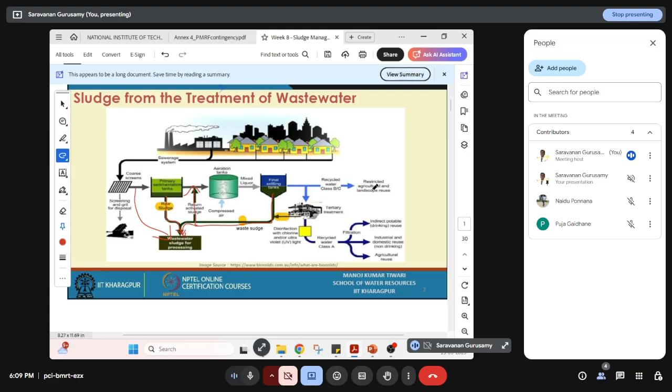If some tertiary treatment with chemicals is required, that also will produce some sludge, that is chemical treatment sludge. Okay, so any conventional biological wastewater treatment process, although efficient in removing organics, generates a large quantity of excess sludge because we are using microorganisms for the removal of organics. They will eat the organics, grow, and their cell mass will increase, right? So new cells will be produced.

After new cells are produced, the old ones will die. So the whole bulk biomass settles as suspended solids. That's why a large amount of sludge will be produced in biological treatment processes, especially in aerobic treatment systems. Anaerobic will produce less sludge, like 5% or something, but aerobic will produce 45% sludge, right? That's what we discussed last week.

So sludge refers to residual semi-solid material, a settled byproduct from different treatment plants and systems. So the quantity of sludge will be based on the degree of treatment we are doing. If we are treating only 50%, then 50% will be coming as sludge. If you are treating 70%, then 70% will come as sludge, right? So the quantity of sludge is based on the degree of treatment.

And don't think of sludge management as a simple task. Most of the cost for the treatment plant, 50%, will be for sludge management. Sludge handling itself accounts for 50% of the total cost of a sewage treatment plant. And think about the total cost. If you are spending like 10,000 for treating this much water, 5,000 will go only to sludge handling. Then this is a big matter, right?

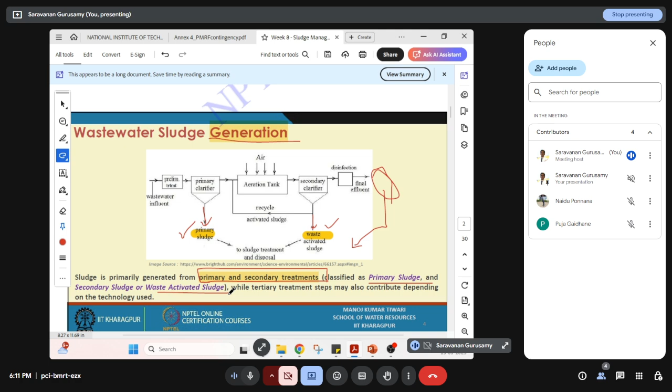Primary and secondary treatment will give you primary sludge and secondary sludge, or waste activated sludge. So these are the types of sludges. I mean, two are the types of sludges. Secondary sludge is also called waste activated sludge. And if any tertiary treatment also contributes, that is called tertiary sludge.

Yeah, what are the characteristics of the primary sludge? As I mentioned, the primary settling tank will only remove the readily settleable organic solids. So mostly it will be organics, and some inerts will also settle, similar to the grit chamber. Then the secondary settling tank will be after biological treatment, so mostly it will be organics only. Dissolved organics will form biomass and that will settle. So mostly the secondary settling tank will have organics.

So primary sludge will be composed of settleable solids from the raw wastewater, in sedimentation and at times in the grit chamber also. The grit chamber will be fully inorganics. Sedimentation will be organic but suspended, right? So the generation range, if you see, is 100 kg, average 110 to 170 kg per million liters. So if you have a plant of 10 MLD or 5 MLD or 100 MLD, calculate the kg of sludge accordingly. That much huge tons of sludge we are generating.

What do we do with the sludge? We are simply doing a phase transfer, right? Whatever the waste in the wastewater, we are converting it again into the solid phase, and we need to treat this solid waste also again.

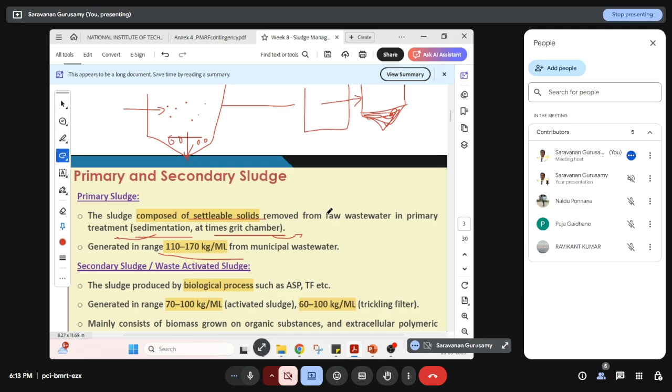So that's the problem. So sludge management is a major cost incurred in a project. Okay, then secondary sludge, if you think, that will be from the biological process like ASP or trickling filter. The trickling filter also, if you see the tank, after pouring all the water, it will pass through the filter and it will come out as big sludges. Like filtration also will happen; after this it will be sloughed off and it will come along with the effluent. That will also be collected.

In ASP also we have a secondary settling tank. In trickling filter also we need a secondary settling tank. So this generation will be 70 to 100 kg per million liter of activated sludge. For trickling filter, it will be around 60 to 100 only. So mainly it consists of biomass. There it will be inorganics. Here it will be fully biomass, grown on organic substances.

Got it? Yeah. So different stages of sludge, as I mentioned, again primary sludge, secondary sludge or waste activated sludge. That will be first thickened. After sludge got produced, it will be thickened and it will be sent to the digester. So that is digestion. After digestion, it will be dewatered. Finally, the dewatered sludge will be managed properly. You got it? The whole system is called management. Finally, it will be disposed.

Okay. First, we need to reduce the volume, that is thickening. Then digestion, so any leftover organics that are there will be digested. Then conditioning. After that, dewatering. After that, sludge disposal. You got it? The whole chart I will show you in a minute.

So the major problem with the sludge is sludge contains only 10% solids, the remaining 90% will be water. You got it. So think about the total quantity. If you have 100 kg of sludge, 90 kg will be water, only 10 kg will be your solids. So simply if you put it on gravity itself, 90 liters of water will come out. Only 10 kg will be retained in the tank. So gravity itself will remove all the water, right? So sludge is not only having solids, it will have mostly water in it, 90%.

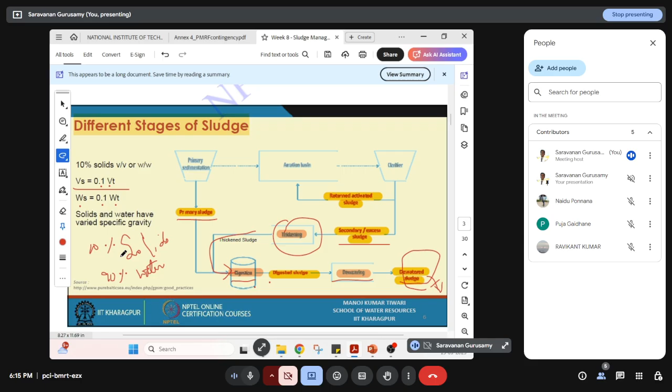So volume calculation, if you do, volume of solids will be 0.1 times the total volume, and weight, if you see, that will also be in terms of this. So you can calculate the specific gravity. If you are given the total specific gravity of the sludge, and you know the specific gravity of the water, then you can find how much solids are in it. You got it? Yeah. To calculate the quantity and what will be the characteristics of the sludge.

If you see the primary sludge, that will come from the grit chamber, scum tank, that is the skimming tank, which will remove all the scum and grease, and then primary sludge from the chemical precipitation. So screening will be mostly organics and inorganics like plastics, rags, wood, everything will be taken in the screen, right? So based on the screen size, it will get clogged. So that contains mostly organics or inorganics. It will vary based on the seasons.

Then grit will be fully inorganic solids because it will settle, like sand and clay particles will be settled in the grit, and it will be of relatively high settling velocity. Okay. Then scum and grease, it will be floating materials like grease, vegetable, minerals, animal fat, wax, soap, hair, paper, cotton, cigarettes, plastic materials, and all will be floating. That will be taken with the scum and grease chamber, the floating materials.

Then primary sludge from the primary sedimentation tank will be gray and slimy, and it will be readily digested under suitable conditions because it has mostly organics that can be easily digested. Sludge from chemical precipitation will be dark in color, mostly containing iron, because we are using iron as a chemical to make the flocculent sludge, right? So iron will also come with this sludge. What we have added will come along with the sludge.

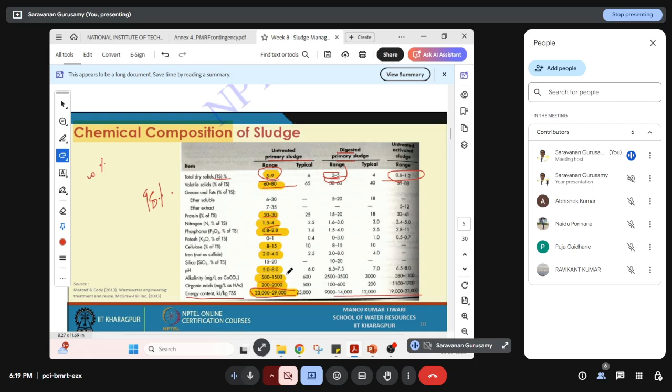Then the energy content of the sludge is very high, like 23,000 to 29,000. After digestion it will reduce, but untreated primary sludge has lots of energy content. So after removing the water, the dried sludge we can use in an incinerator, like cow dung. After drying, we can use it as an energy source, as a fuel. Similarly, most of the sludge solids are organic, having calorific value. So this is a major characteristic of the sludge.

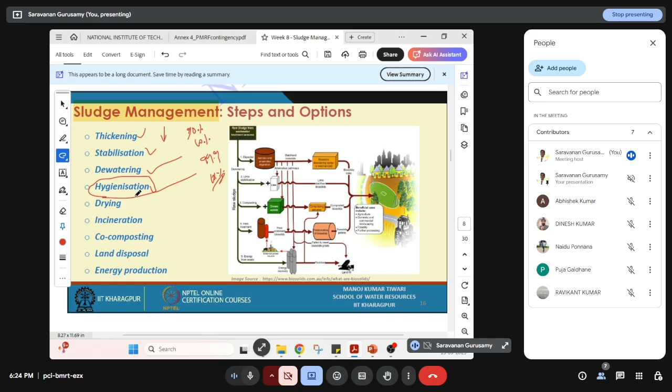Then stabilization is whenever there are odor-producing compounds or partially degraded organics that need to be stabilized. Then dewatering - any excess water is removed. Then hygienization - since it's from wastewater, pathogens need to be killed, sterilized before disposing. Then drying. After sterilization, we can dry the waste and think about disposal: incineration, co-composting, land disposal, or energy production, based on the characteristics. If it's inert material, we can simply dispose in the land. If organic, we can think about co-composting. If it has high calorific value, we can think about incineration or energy production.

So thickening - after reducing the water content, some portion will be there, only solids that need to be stabilized because it has some volatile content, so half of that will be removed. That needs to be dewatered again, so again 70% will be removed. From that we have to do drying. So after drying, again a small quantity of sludge will be there, but that itself is a huge quantity. That needs to be disposed properly, based on characteristics - incineration, composting, or land disposal. You got it?

So can you explain the flow chart diagram? This flow chart - yeah, let me do it.

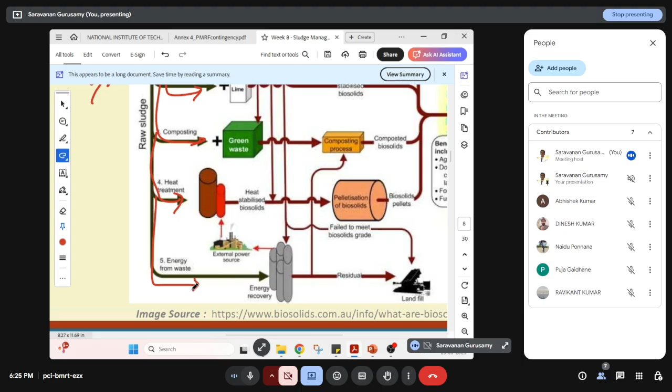Sure, so here, if you see raw sludge from the wastewater treatment plant - where it is coming from, we have grid screening first, then grit chamber, then primary settling tank, then secondary settling tank. All the primary as well as secondary sludge is coming in. I am going to explain all this process in the upcoming slides. First we are going to thicken the sludge, then digest - digestion is one of the processes of stabilization. Then lime stabilization we can go. After that, composting, heat treatment is one of the sterilization techniques, that is the hygienization technique. Finally, energy from the waste, that is one part of disposal. You got it?

So you can think about this same flowchart - this is one of the adopted methods in the municipality, but you can think about any of these combinations and try. So composting will also give you again secondary or tertiary sludges - that solids you need to take care of. Again you need to think about land disposal and all. So if you are thinking about both material as well as energy recovery, this combination will work out. You can recover nutrients, you can also recover solids, you can also recover energy out of it. You got it?

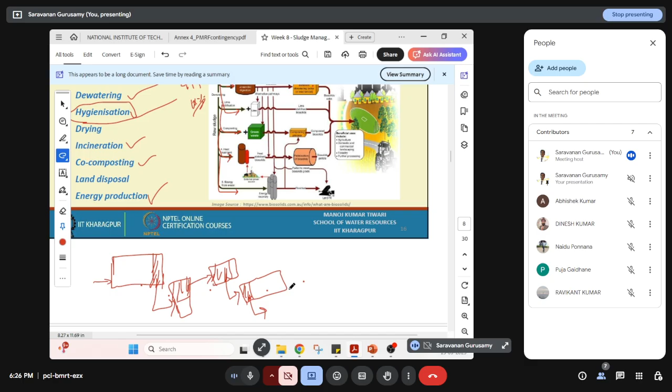Anyway, I'm going to explain all these methods in the upcoming slides. This is first, I'm just explaining the route map: collection, thickening, stabilization, conditioning, dewatering, then disposal. You just make the flow chart. Okay, understand the flow chart, then we will discuss now.

So now the various disposal options: first land-based disposal, fuel-based disposal. Again, sludge disposal options - we have land-based and water-based disposal systems. So think about this land sludge use option versus sludge disposal option - first is benefits and constraints. See, if you are using sludge directly on agriculture, reclamation, forestry as a fertilizer, or reforestation, regeneration of forest - this kind of activity using sludge directly has benefits of nutrients because we have lots of nitrogen, potassium, organic matter in it, and low cost. But the problem is it's vulnerable to the ecosystem as well as to human health, and has variable demand.

We can't supply every day the same quantity. Quality matters, it will not be similar seasonally, it will vary, and competition will impact it. But if you think about fuel-based options like incineration, supplementary fuel for co-combustion, we can do that. Along with coal, we can use the sludge as a secondary fuel, as well as gasification. If we do this, we get green energy, and transportation cost will also be less since it's a continuous process.

But the problem is public perception. People will not allow you to incinerate anything. So even if it is a controlled environment, we can't incinerate any waste, since that will have air pollution constraints like emissions.

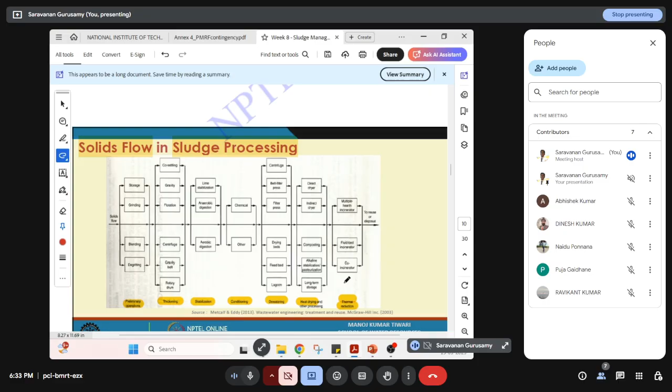Think about sludge processing. As mentioned: primary operation, thickening, stabilization, conditioning, dewatering, heat drying or any drying method like a drying bed, then thermal reduction, and finally disposal — reuse or disposal.

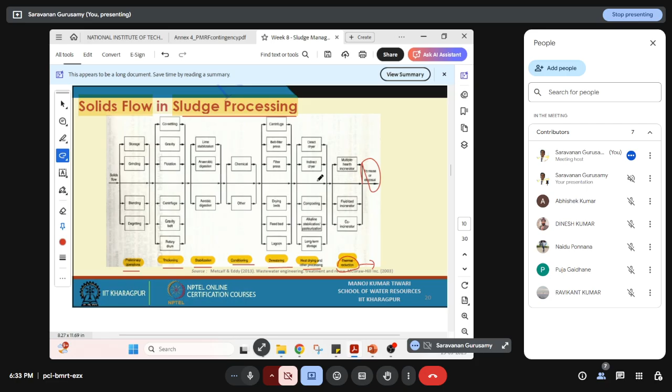Sludge thickening is the first step in sludge management after collection. As mentioned, 97 to 99% will be water content, so the remaining is solids content, that is the dry solid content — 0.5 to 1% if it is secondary sludge, but if it is primary sludge, it will be 4%.

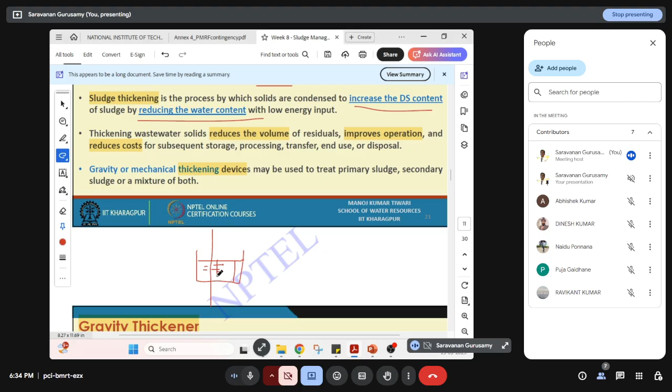What is the purpose of sludge thickening? It increases the dry solids content and reduces the water content. If you have 100 kg, 10 kg is solids and 90 kg is water. If I reduce the water content, the solids proportion increases, say to 50-50. That's the purpose of thickening — it reduces the volume, improves operation, and reduces cost.

So gravity and mechanical thickening devices may also be used. I am going to discuss these devices.

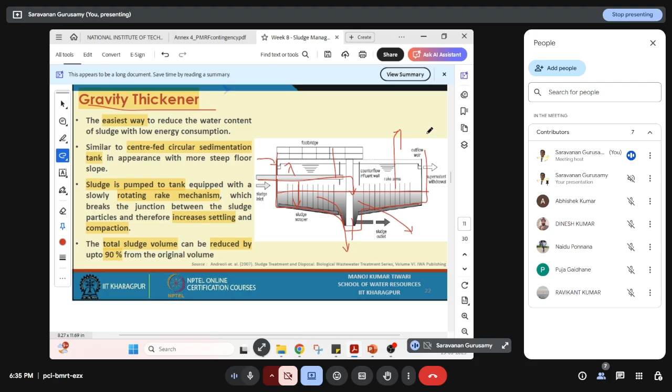First, the gravity thickener. Simply like the primary sedimentation tank, we have a tank with arms for mixing that help take out water from the sludge. It slowly turns and the water comes out to the top while solids settle to the bottom — that's the thickening process. It's a central feed circular tank: sludge inlet feeds in, water is taken out, and thickened sludge is taken from the bottom. Total sludge volume can be reduced up to 90%. If you pour in 100 kg, you get 10 kg of sludge and 90 kg of water out, which can be sent back to the treatment plant.

Here you have to consider the solids loading rate, 90 to 150 kg/TS per square meter per day. Any tank will have a surface overflow rate or solids loading rate, based on how much kg we supply to the treatment system per square meter of area per day. Based on that, we can design the area of the tank.

Then dissolved air flotation: we supply air from the bottom in the same sludge thickening tank, and it mixes continuously. The bubbles help take out the water, and the thickened sludge is taken from the other side. The solid particles with attached bubbles have lower specific gravity, so they separate from the water. We add air because solids have a specific gravity of 2.5, but adding air bubbles reduces the specific gravity so solids come out this way. We can also add alum or polyelectrolytes to increase flotation efficiency. We design based on solids loading rate, in the range of 100 to 150 kg/TS per square meter per day.

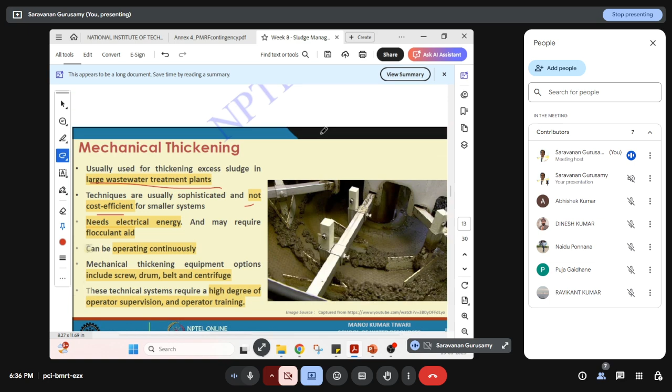Then mechanical thickening — usually used in large wastewater treatment plants, but not cost effective since it's simply a tank. Here we need to operate mechanical arms, requiring electrical energy and flocculant aid, operating continuously, but that is the only best option.

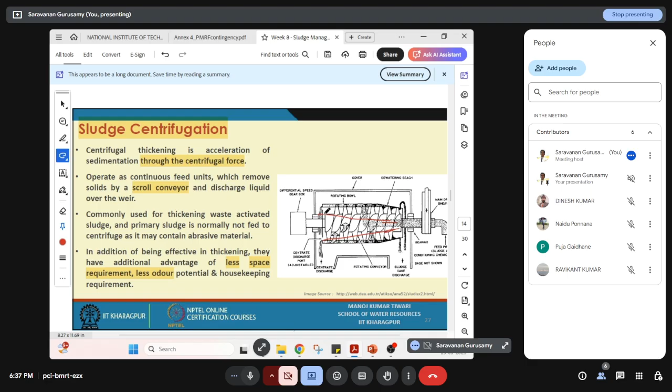We have different mechanical thickeners like screw, drum, belt, and centrifuge. You see, the screw will be reducing the screw area. So first it is the centrifuge system they are explaining. Here there is no size reduction, the size is the same, but if you see here the size is reducing, right? That is a screw.

This is the centrifuge. The sludge is given as an input and it is turning at a fast speed, like a washing machine kind of thing. So all the heavier particles will be forced to the circumference. That's the centrifugal force, right? The same process we are using in air pollution equipment also, like the air is passed through a centrifugal system so that all the heavy particles like solids will be attached to the surface and settle, and pure air will go out.

Similarly, I'm putting sludge into the system, it will be rotating at a faster speed, so the heavier sludge will go to the circumference and only the water will be coming out. You got it? This requires less space. A normal thickener will have a big tank, but this requires a small land area.

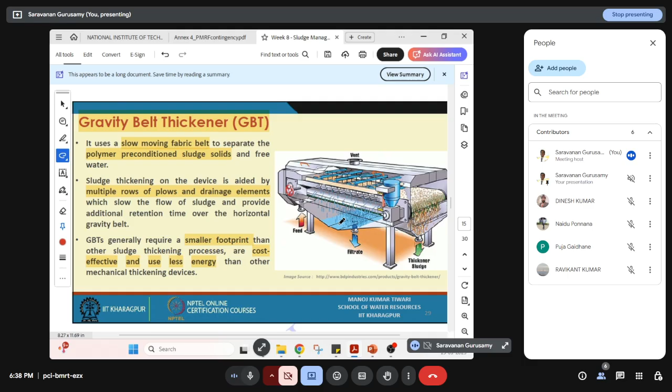And the rotary drum thickener, here there is a filter bed. So, a filtering drum. Both sides you have a filtering drum, and feed will be given into this. While moving in this, water will be drained, so filtered water will be taken out. Again, it can be conditioned along with polymers. Then the belt thickener. It's moving with the belt and water will be coming out. Same like the drum thickener. This is a belt thickener.

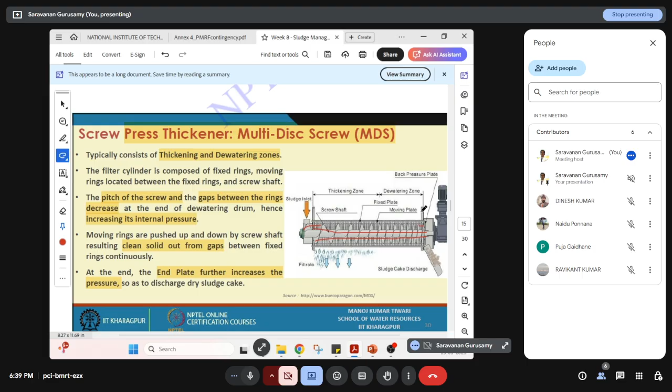Finally, the screw press. Whenever this much area reduces to this small area, the sludge is screwed, right? So while screwing, we have a squeezing effect. Squeezing will remove the water content of the solids. So if you see the performance, the screw thickener will give 4 to 7% dry solid content, but when it is higher, you can use other things like drum thickener, belt thickener, centrifuge thickener.

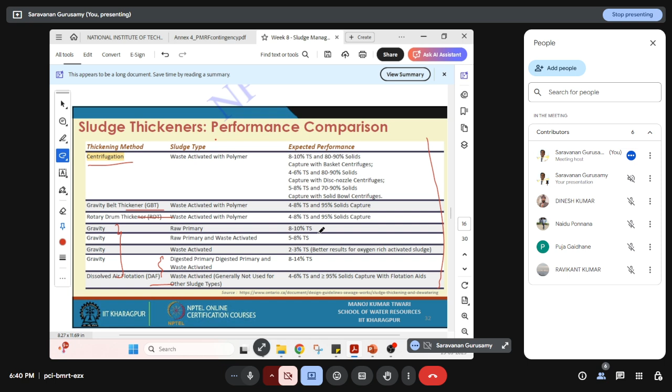Why? Air will attach to the solids and reduce the specific gravity of the solids, and then they can be taken out separately. Right? So think about the solid capture efficiency, how much percentage of solids is captured. It will be higher for gravity, 8 to 14.

Now we are going to sludge stabilization and conditioning. After thickening, what is the second step? The undecomposed or partially decomposed organics need to be taken care of. That's sludge stabilization. After thickening, the second step is sludge stabilization or digestion. We are using aerobic and anaerobic treatment systems for sludge digestion because the partially decomposed matter needs to be fully decomposed. Sludge stabilization reduces the reactivity of the sludge, so whatever organics remain will be digested and the residue will have zero reactivity, right?

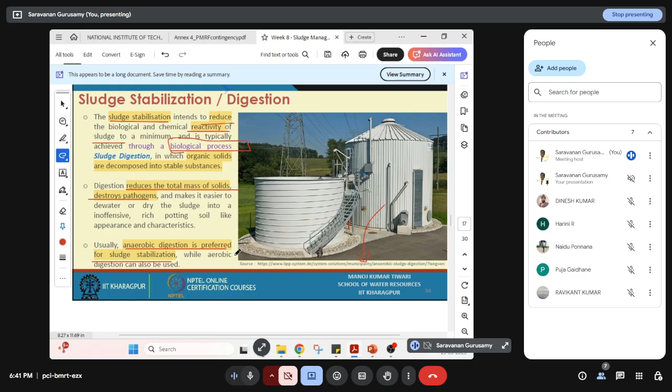So what process can we use? Again, biological process only. It reduces the total mass of the solids and destroys pathogens, because an anaerobic system can also reduce the pathogen content. Anaerobic digestion is preferred for sludge stabilization because of the strength of the wastewater. If the strength is more, we have chosen anaerobic only, right? Because we can recover methane out of it.

But here the reduction of organic content is 40 to 50%. And in thermophilic digestion, by addition of heat, the sludge is fermented in the tank at 55 degrees Celsius. If you are not using temperature, then mesophilic bacteria will act, and 36 degrees will be the optimum range. Mostly it will be taken care of by the facultative anaerobes, that is, the anaerobes that can live both with oxygen and without oxygen.

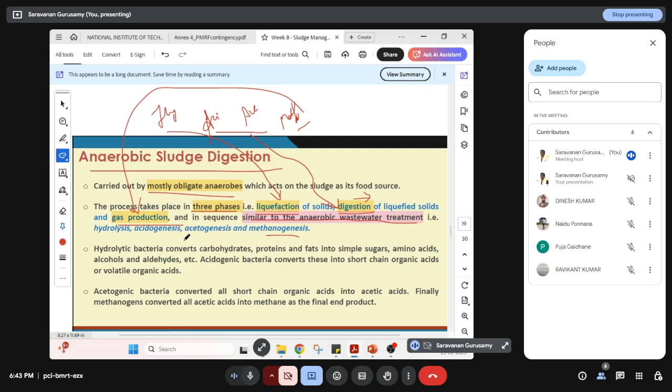Acido and aceto they will take as digestion, and methanogenesis they are calling gas production. Similar to anaerobic wastewater treatment: hydrolysis, acetogenesis, methanogenesis. Here 3 steps: liquefaction, digestion, and gas production. So all the high molecular weight organic compounds will be converted into short chain fatty acids, and then short chain organic compounds will be converted into acetic acid, that is acetogenesis, and then methanogenesis.

Acetic acid will be converted into methane plus carbon dioxide plus other trace gases like hydrogen sulfide, nitrogen, and hydrogen. Overall, the organic matter will be converted into methane and carbon dioxide, and also new cells will be produced. That will be anaerobically digested biomass, and energy for new cells will be produced. Other products will be H2S, H2, and N2.

Again, anaerobic sludge management has 2 reactor setups: one is low rate and the other is high rate. In low rate, we are feeding the sludge, and digested sludge will come to the bottom. The active digestion will happen in the active zone. Water will come up, that is the supernatant, and a scum layer will be there. The produced biogas will be stored in this gas tank and taken out. That is the low rate reactor.

But if you think of the high rate reactor, there are no distinct layers. All will be completely mixed. So the whole reactor will act as an active zone, and then we need a secondary tank to settle. The digested sludge for dewatering we have to take to the secondary tank, but gas will be produced here itself. See, single stage and dual stage, that is high rate.

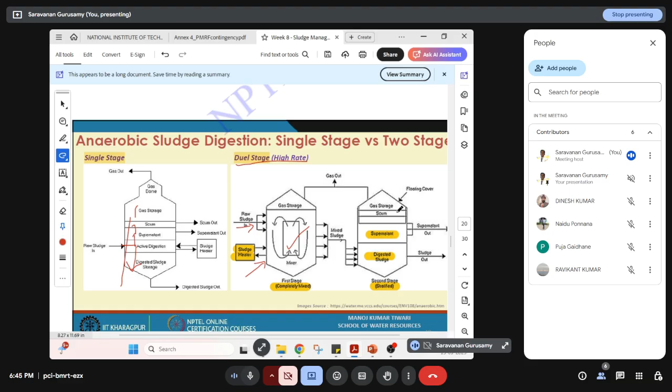Single stage has all the layers: the active layer, digested sludge comes into the sludge layer, and then supernatant and gas storage. But here all these things will be mixed. We can supply heat also. Raw sludge will be fed into this complete mixing. After that, we need a second tank. There won't be any active layer because all activation is happening here itself. So only for settlement we use this tank.

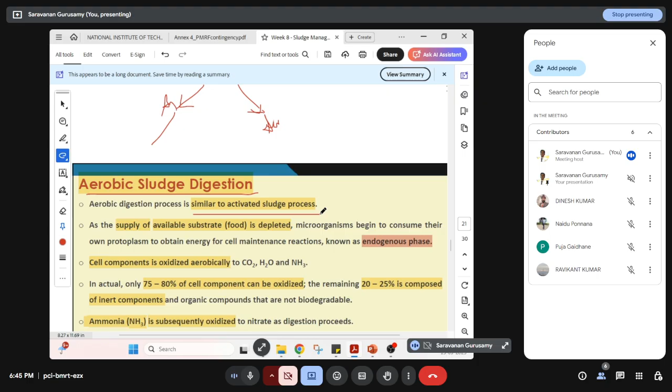Then aerobic sludge digestion. As of now, we have seen digestion by the anaerobic system, which has the same steps. But in the aerobic system of sludge digestion, similar to the activated sludge process, the supply of available substrate is depleted. Because in ASP, air will be passed from the bottom, mixed with the wastewater, and organics in the wastewater will be digested by the microorganisms by taking the oxygen.

We are maintaining the food to microorganism ratio. Food is the substrate, microorganism is the biomass. So we maintain the substrate to biomass ratio so that there is no fasting condition and no feast condition. Similarly, here more substrate is there, but oxygen is low. We need to supply a very small quantity of oxygen because we can't supply that much oxygen in the sludge. The supply of available substrate food is depleted; we are not supplying full food.

So microorganisms begin to consume their own protoplasm. Here the endogenous phase is happening. Cell components are oxidized, so CO2, H2O, NH3 will be released. 75 to 80% of cell components will be oxidized because the bacteria start degrading their own biomass. 20 to 25% will be inert compounds that cannot be degraded. Ammonia will also be oxidized in this aerobic sludge system because we are supplying oxygen.

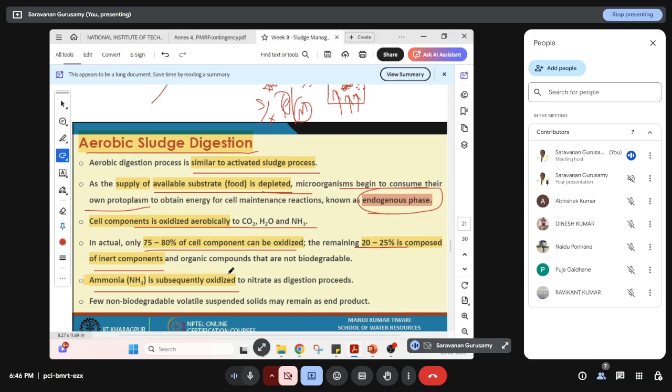Any organic matter or microorganism biomass reacting with oxygen will give you CO2, H2O and ammonium carbonate. Here there is no CH4. Why? Because we are adding oxygen; it is aerobic sludge treatment. C5H7NO2 is the formula for the cell mass, any bacterial biomass. So it is aerobically digested, and this is the major pathway.

Nitrification will also happen, so overall we have nitric acid as a product. Then denitrification will happen, reducing nitrate to nitrite and then nitrogen gas. So that's the process. Ammonia will be converted when oxygen is added to NO2 nitrite, then after adding oxygen, NO3 nitrate, and then the denitrification process will produce nitrogen gas.

Then after thickening, after stabilization or digestion, the third step is sludge conditioning. Why do we need to condition the sludge? So that it can be easily dewatered. Okay, so to improve the dewatering characteristics, we need to prepare the sludge for dewatering. That preparation step is called sludge conditioning, right?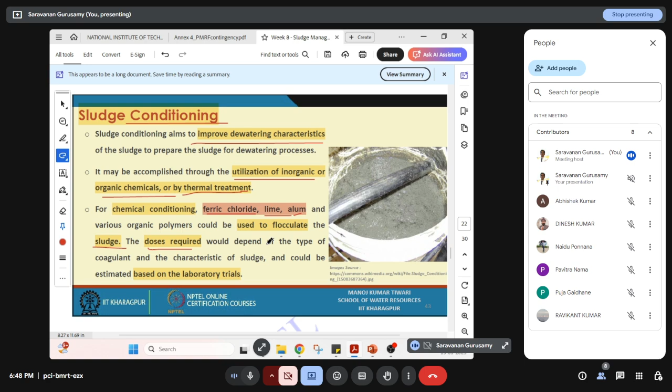So for preparation, we can use salts, minerals, lime, or metals. So using inorganic or organic chemicals or by thermal treatment, we can condition the sludge. Chemical conditioning means ferric chloride, lime, alum, or conditioning agents used to flocculate the sludge so that it can be easily dewatered. How much dose of these chemicals is required is based on laboratory trials. We can take the sludge to the laboratory and do different trials to identify the dose of chemical

conditioners, right? So sludge conditioning by thermal treatment: wet air oxidation and heat treatment. The temperature goes up to 300 degrees in one, up to 200 degrees in the other. We have 8 Newton per meter square pressure, and there 1 to 2 Newton per meter square of pressure. Low temperature and pressure heat treatment coagulates solids and breaks down the gel structure. All this conditioning is flocculation techniques only. All the solids come together and form a floc. That's called coagulated solids, and it breaks down the gel structure.

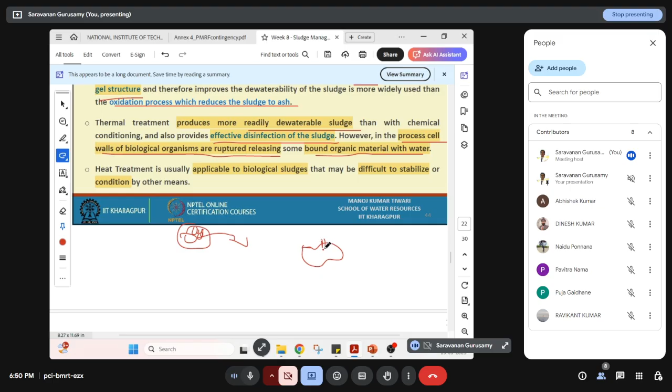The oxidation process reduces the sludge to ash because it's a thermal treatment, right? Another important advantage of thermal treatment is it will effectively disinfect the sludge, because the heat will degrade the pathogens, and it produces readily dewaterable sludge. Also, the cell walls of biological organisms are ruptured, releasing bound organic matter into water. Most of the sludge is biomass, so thermal treatment breaks down the cell wall so the water inside comes out. That reduces the water content of the sludge.

That's why thermal treatment is usually applicable to biological sludges that are difficult to stabilize or condition by other means. You got it? So sludge conditioning is required to improve the dewatering characteristics. The next step is dewatering. In the conditioning mechanism, with chemicals like alum, ferric chloride or lime, only flocculation happens, but with heating, cell wall breakdown, hygienization, surface property change, cell splitting, everything happens. Inorganic chemicals increase the sludge mass, but heating reduces the existing cell mass because we are breaking it down. So solids reduce. Finally, dewatering, hygienization and disposal.

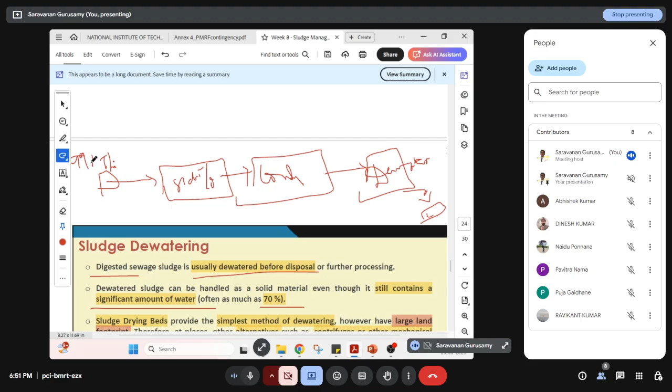If you see here, thickening. After thickening, it goes to stabilization or digestion. After digestion, we do conditioning. After conditioning, we do dewatering. Why do we need to dewater now? The remaining water will be removed. Finally, drying will also be there. We usually dewater the digested sludge before disposal or further processing. It still contains a significant amount of water, up to 70%. The 99% water was reduced to 70% at this stage, so we need to reduce it still further.

The sludge drying bed is the simplest method, but it has a large area footprint. Alternative methods are mechanical, like centrifuge and other mechanical dewatering systems. In a centrifuge and belt filter press, we put the sludge into the filter press, which presses and removes the water from the sludge. That's another dewatering principle. We also have the chamber filter press and screw press, relatively expensive compared to other means. Simply, we can use a sludge drying bed.

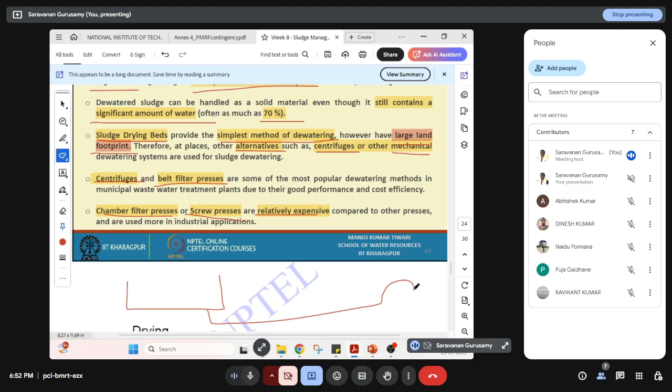If you go to any municipal treatment plant in your area, or in NIT also, we have two STPs, sewage treatment plants, with drying beds. All the sludge collected is put into the drying bed, where it dries, and cracks form, which indicates complete drying of the sludge.

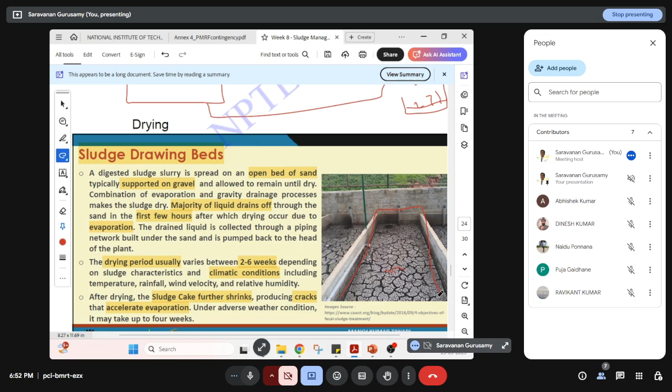So that can be taken out and we can dispose properly. See here, we have seen this kind of tanks, right? Mostly in the STPs. So sludge drying bed, not drawing, that's a drying bed. Okay, so it's an open bed having sand and stone at the bottom as a supporting layer. So above that we can put the sludge with 70% of moisture content.

So majority of the liquid drains off. So we have a perforated pipe at the bottom. So whatever the water that is coming, that will be collected through the pipe and it will be coming out. So first a few hours itself, it will be removing all the water under gravity as well as the evaporation. After that, it will be still operated at 2 to 6 weeks, so that whatever the remaining water content will also get removed by evaporation.

Finally, there will be a sludge cake. That cake will shrink, cracks will be formed, that will all again accelerate the evaporation process. You got it? That final sludge cake is ready now. So that can be disposed or used for energy production.

Again, if you see the section view of the sludge drying bed, we have a supporting media and a perforated pipe drainage system. First few hours draining will happen, then evaporation will happen, and in the course of time again evaporation and draining will happen. Okay, so focusing on the weight reduction, all this sludge management will concentrate on volume and weight reduction by removing the water. Okay, so the disposal cost will be minimum after doing all this.

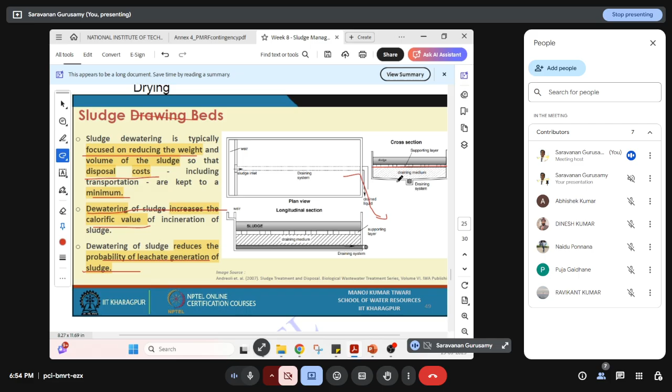Right. So other methods we have: belt press, polymer conditioning, lime. Polymer, why are we adding polymer? That will also remove the water content. Right. So here the best is sludge drying bed only. But why are we not using that? It has a larger land footprint. We need a huge land. 7 days means 7 drying beds kind of thing we need.

But centrifuge and all, it's an equipment or mechanical device to dewater, like belt press, filter press. I don't have an image of that. Let me show you. There are two belts. So the sludge will be moving through this. So that presses the sludge and it will form a cake out of it. So water will be coming out through the filters. That's a press filter.

And then finally hygienization. Why do we need to hygienize? Because all the sludge will be produced from wastewater treatment plants that have mostly pathogens. Because human excreta may have pathogens, sewage will mostly have pathogens, right? So we need to hygienize by sterilizing the bacteria, disinfecting to remove the pathogenic bacteria, as adopted by the competent authority.

Why do we need to conform to the disposal standards? Now, most of the government organizations are releasing toolkits and guidelines for the disposal of sewage and biosolids. Fecal sludge. I have attended a program on fecal sludge management in the CSE, Centre for Science and Environment. You can see in Google CSE. They have a toolkit for fecal sludge or biosolids management.

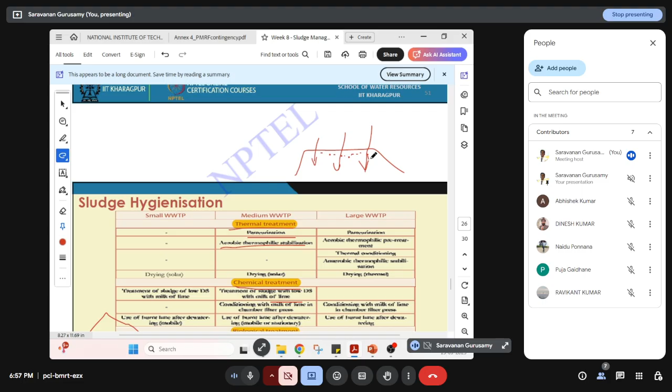Again, it will increase the water content, but still it will be taken along with the sludge itself. So, if you spray bioculture, it will stabilize or remove the bacteria in it. Right? But if you compare composting, lime treatment, and the pasteurization technique, investment cost will be high for composting, but the energy demand will be high for pasteurization. Chemical demand will be high for lime treatment. Structure material will be high for composting.

Again, sludge dewatering is needed because in composting we are adding bioculture. So again, sludge dewatering is needed. Then space needed: composting will be higher. Hygienization: very good hygienization will happen in pasteurization. The same way we are doing for milk, we can do for sludge also. Okay.

Finally, how can we dispose the sludge cake? Now we are ready with the sludge cake without water or very less water content. So we can think about the calorific value now, because most of the sludge solids have calorific value, right? So for a positive energy balance, it's the incineration technique, utilization of calorific value. The amount of sludge generated at the municipal wastewater plant is very large, because we have tons of sludge every day. But incineration has another problem, which is air pollution control.

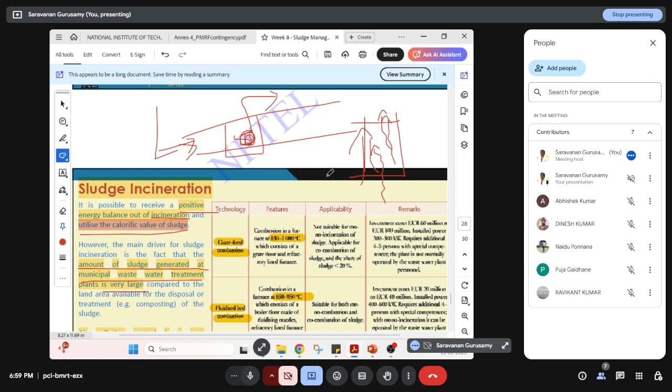That's a major consideration. We have different types of incineration techniques like the grate system and the fluidized bed system. We are passing the sludge onto the grate, that is an oven kind of thing. There all things will be burnt and the gas will be taken out. But the fluidized bed will be on full heat structure. We are passing the solid to float or suspend. The fluidized bed will volatilize the waste and gas will be produced. So that kind of incineration technology you can think on. The temperature here is 850 to 1000, and here it is 850 to 950 degrees Celsius.

See, the sludge energy system. We are producing energy; sludge will again go to anaerobic digestion. With the produced gas, after purification, we can use a natural gas system, right? Final disposal on land or in oceans. Ocean, I think nowadays it's banned, but burying underground in a sanitary landfill is good. But how far? Because we need a liner as well as a capping system. A more advanced method of sludge management is using it as compost or for agriculture. Again, the problem is with the pathogen. If you have a full hygienization technique, you can think about it as a fertilizer and for landscaping, because it has good nutrient content.

I have also published a paper on soil-like material that is recovered from the landfill. How can we use this in agricultural land? I have tested the seed germination as well as the leachability and the pathogenic activity of this soil-like material, so that it can be used along with the agricultural soil in different compositions from 0 to 100%. But my conclusion is, since it has toxic compounds similar to this sludge, like industrial chemicals, it cannot be used for edible plant growth. So we can use it for non-edible plants like sunflower or other oil production. So it's not for human consumption.

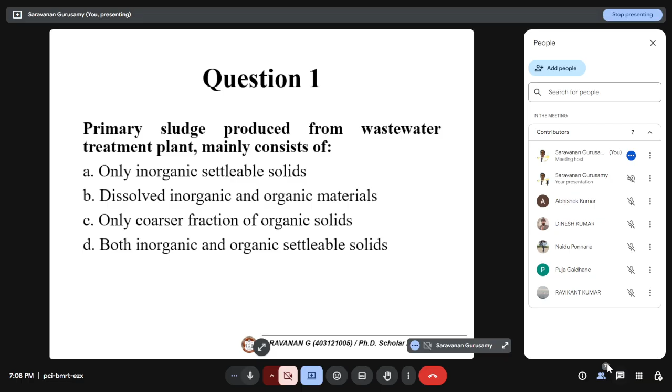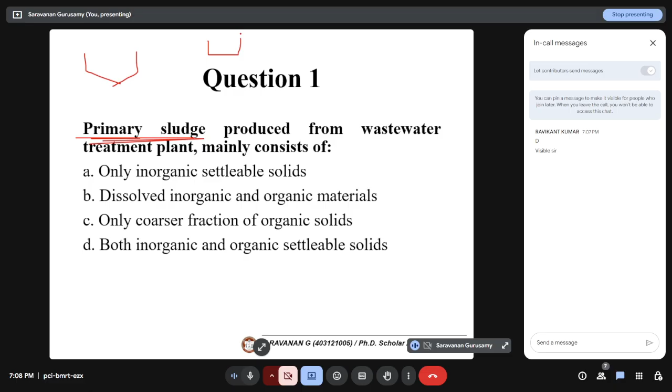Let me take the pen. They are asking about primary sludge. Sludge comes from two things: primary sludge and secondary sludge. Secondary sludge is from the ASP plant or trickling filter. Primary sludge is from screens, grit chamber, and primary settling tank. Grit chamber and screens give you inorganics, while the primary settling tank gives you settleable organics. So both are settleable, that's why they settle in the primary treatment system itself.

So all are settleable is correct. Dissolved solids will be removed only in the secondary settling tank, that is biological treatment. Dissolved organics and dissolved inorganics we can't remove with primary and secondary treatment; tertiary treatment is required. So these are the four types of solids we are talking about.

Now they are asking about primary sludge, which contains grit and screenings as inorganics, and primary sedimentation tank organics - both are settleable. So both organic and inorganic settleable solids are correct. What about secondary sludge? Secondary sludge consists mostly of organic matter, which is also settleable, but it's digested organic solid.

We can call it biomass, not the food itself, but the microorganisms - settled microorganisms - because the microorganism grows bigger by eating the dissolved organic matter, and then it settles. The mass will settle. Can you see now? I think you are writing. Yes sir, okay then.

Let me move to the second question. So here, primary sludge consists of settleable solids - both grit chamber inorganic and sedimentation tank organic. Got it? Then the second question: which of the following produces waste activated sludge?

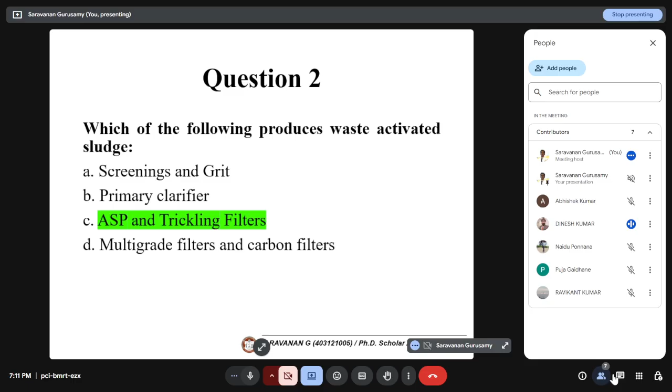It's not from multigrade filter or carbon filters. Okay, the answer is clear. Could you explain trickling filter also, sir? Sure, we discussed trickling filter in week four.

The wastewater after primary treatment will have only dissolved organics, because suspended organics are removed in the primary clarifier, and inorganics are removed in screenings and grit chamber. So only dissolved organics come after primary treatment. There will be a central tube with an umbrella-like structure that trickles or sprays the water onto the tank, which has pebbles, sand, or any media.

In ASP, the bacteria grow in suspension - that's a suspended growth system. But here the bacteria grow on plastic media or stone - it's called an attached growth system. So the water comes, and the bacteria attached to the media eat the organics and grow, and then purified water comes out since it's also filtering the solids.

After that it moves to the settling tank similar to ASP, where it settles the sludge. After some time, the bacteria grow, and the inner bacteria don't get any oxygen, so it peels off - all the layer peels off. This comes back to the tank and settles. So lots of mechanisms happen in the trickling filter: filtration, sedimentation, biological oxidation, impaction, interception - everything happens there.

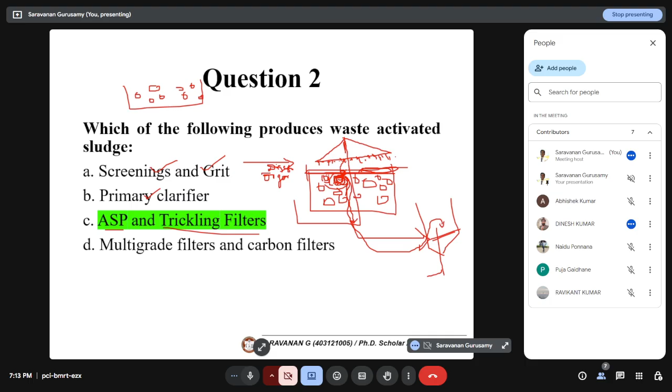Sir, in trickling filter, does this media have to be replaced? No, media is inert - it's like sand, gravel, or plastic media. Only the bacteria grow on it, and after some time it peels off. So there's no need to replace the media until it gets cracked.

Until it gets cracked - like if we put soil media, clay soil and such will crack, or mud balls will form, in which case you have to replace the media. Got it, thank you. Sir, is it only present with inorganic substance, or is organic also present?

Solids in the sense, here the inlet water - are you asking about here or the media? In the media, the media should be inert. Any plastic balls or any plastic media or gravel like stones, sand, that can be used as media - not organics. Nothing should be organic, because we are removing this kind of things from the water, so we should not add any.

Yeah, okay, let me move on. So again, if you see, secondary sludge will be coming from activated sludge, will be coming from trickling filter as well as ASP.

Okay, third question, the typical range of organic fraction of solids in the secondary sludge. Secondary sludge will consist of mostly organics only, right? Because biomass. Primary sludge will be containing inerts as well as organics, but secondary sludge will be organic. So yeah, it's correct, 60 to 90 is correct. Mostly organics.

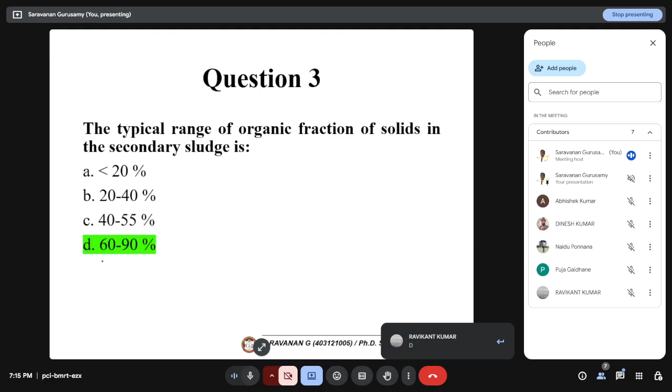Secondary sludge. Then fourth question, I am reading two statements, please go through and answer. First statement is sludge digestion leads to sludge stabilization. Digestion is stabilization - leads to decomposition of organic solids present in the sludge into a stable substance, because whatever undecomposed or partially decomposed organic matter will be converted into stable substances. Okay, so that seems correct.

Second statement: sludge digestion also significantly reduces the water content of the sludge. So both are correct, right? Correct, yeah. Digestion - they are not asking about thickening or dewatering. So does digestion reduce the water content? It will actually increase, because the cell wall will break down and water will be released during the stabilization process.

See here, sludge digestion, stabilization reduces the total mass of the solids, not the water content. You got it? So it will actually increase - it is increasing the solid content... no, decreasing the solid content, not water.

Because it's digesting - if you are thinking about anaerobic digestion of sludge, you are putting 100 kg of sludge, so water will be as it is. Only the bacteria will act upon the 10% solids you are putting in, so it will convert that into biogas, and 10% will be converted into 5% of solids. Then it will go to dewatering. Okay sir, got it, yeah.

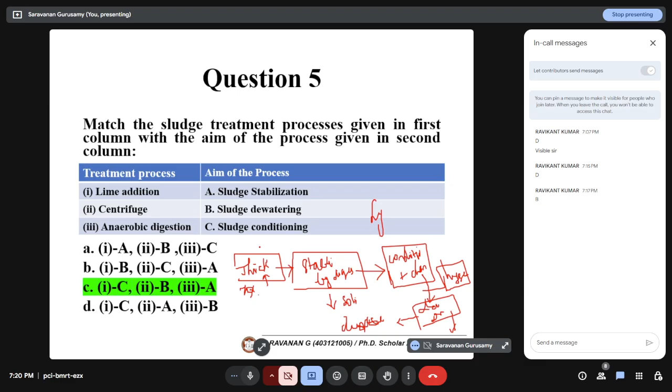So this conditioning and hygienization are required when we want to use this as compost in agriculture. Again, there is a problem: if you are adding chemicals like ferric chloride and all, that will come along with the sludge. So can it be suitable for agricultural purpose or not? You have to think.

So conditioning will be done only to dewater. If you are putting it in the agricultural land directly with the water, also you can put it, I guess 70% removal of water after thickening, after pressing directly you can put it in the drying and then putting it in the solids. So if you want to remove whole water, conditioning is required, like industrial processes do the conditioning steps and all.

But for municipal solid waste, adding chemicals to dewater is a cost intensive process. In practical, I've seen that while we are using belt filter press or centrifuge, we are using polyelectrolyte as an additive for making the sludge dewater more. But that polyelectrolyte, where is it coming from? Is it organic source or inorganic? That's the matter.

That I don't know, but it is ionic polyelectrolyte. If it is ionic, again the limit for the sludge, you need to do characterization of the dried sludge before disposal into the agricultural field.

I've not used alum and lime for this, but I have been working with ferric chloride. Ferric chloride kind of polyelectrolyte is common, correct? Because that will flocculate the solids and water will be coming up, so that will help you in dewatering. Flocculation is what matters here.

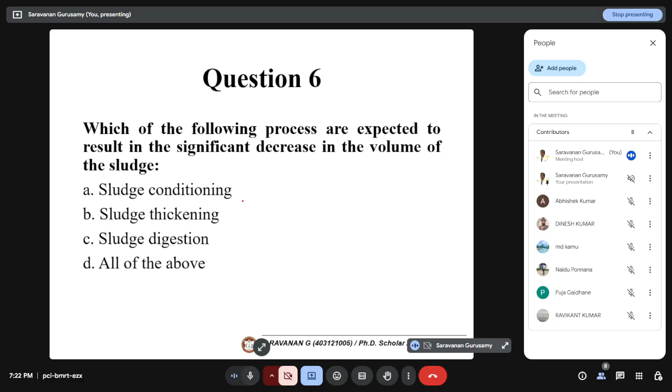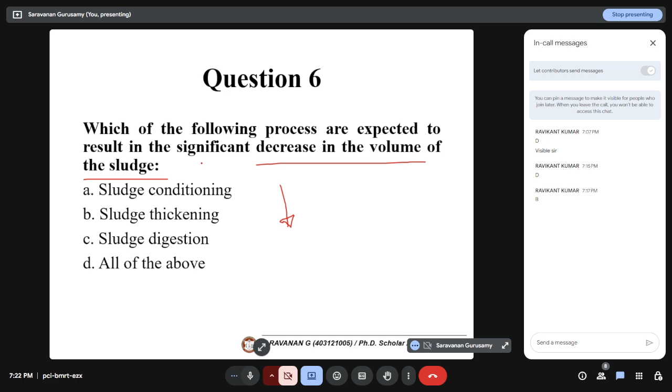So which have water reduction, I mean volume reduction of sludge? So volume will be reduced only in digestion, it will reduce the sludge, but significant decrease in volume will be in sludge thickening. 70% reduced water, but here only the solids is 1%, out of that 1%, if 70% is removed also, there is no significant reduction in the whole thing. Our aim for sludge digestion is that the organic content in that 1% should be fully decomposed, it's not about volume reduction.

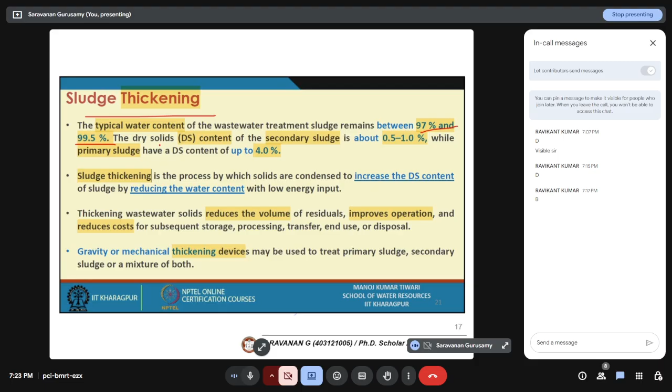So sludge thickening will reduce it, see 97 and 99.5% is water content, that reduction to 70% is our aim in sludge thickening. By gravity settling, the thickener itself reduces 90% of the sludge volume. This is a significant reduction even in the gravity thickener itself.

Moving on to the seventh question. In aerobic sludge digestion, again we have anaerobic and aerobic. Anaerobic is the mostly used sludge digestion process because sludge has high strength organics, right? But they are asking about aerobic sludge digestion: nitrogen in the cell mass is converted to what?

We have a thing, right? So ammonia or nitrogen will be there in the cell mass. What is the sludge cell mass formula? Let me go to the lecture materials. Cell formula is C5H7NO2. That is the biomass chemical formula.

So this will be added with oxygen because we are doing aerobic. So CO2 will be formed, H2O will be formed, and nitrogen will be converted into ammonia, and then that will be converted into nitrite because we are adding oxygen. Then it will be converted into nitrate because again we are adding oxygen. Then finally we have the denitrification process, that is actually anaerobic.

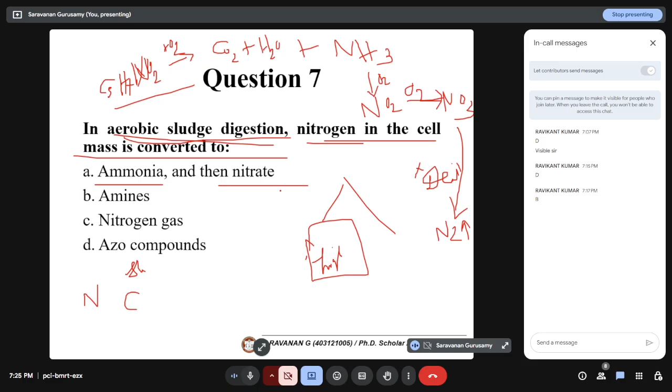It should be anaerobic, so it will produce nitrogen gas into the atmosphere, so nitrogen is reduced. So here they are saying in aerobic sludge stabilization, nitrogen in the cell is converted first to ammonia, then to nitrite, then to nitrate. You got it? Yes, ammonia is subsequently oxidized, but in an anaerobic system it will not oxidize the ammonia.

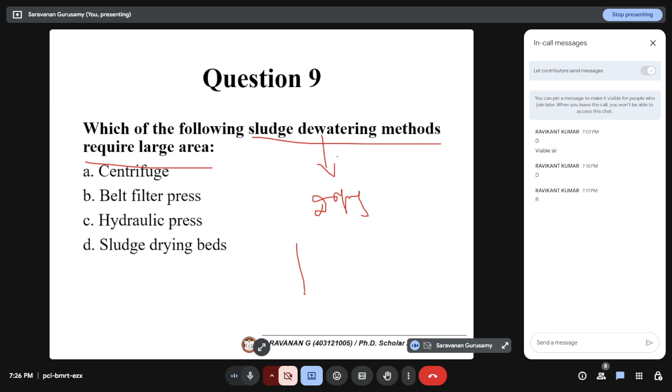So ninth question, which of the following sludge dewatering methods requires large area? Sludge dewatering in the sense again drying, right? The final step. So sludge drying bed, centrifuge, filter press, hydraulic press, which requires larger area? Centrifuge, filter press, hydraulic press, sludge drying bed. Because sludge drying bed requires 4 to 6 weeks.

But this is continuous process. All of these are continuous processes. Immediately the cake will come out. But this will take 6 weeks. So over that 6 weeks, we need to put the sludge. Every day this many tons of sludge are coming, right? So we need many drying beds, so that after the 6th week, I can take out the first tank and I can refill. So until 6 weeks, I need to store it in different tanks. So I need a larger area.

So the problem with the sludge drying bed is larger area. The question is which form of dewatering method requires larger area? Sludge drying bed. You got it? So here sludge drying bed, larger land area footprint. That's the problem. So 10th question, issue with the sludge incineration.

After drying, whatever the cake we are having, that can be incinerated; that's one of the disposal options. And the energy production along with the co-combustion, or agricultural land disposal. First is incineration. So what is the problem with incineration? People will oppose always. Land area is not required that much. Risk of air pollution, that is correct, because if not controlled properly, it will contaminate the air because it's sludge from the wastewater, right?

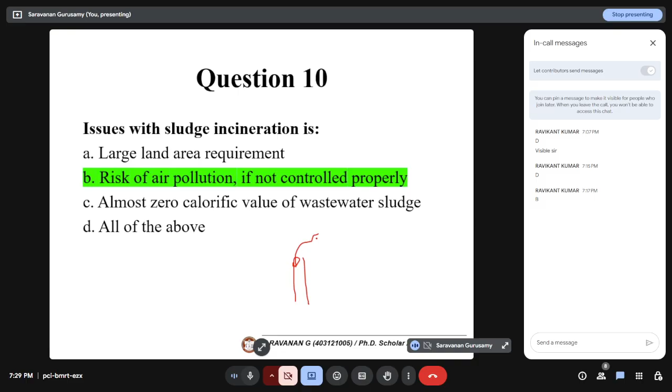But the problem is risk of air pollution if not controlled properly. But anyway, they have to have air pollution control equipment for coal also, right? So along with that, they have to modify somewhat to stop the emission, right? So the sludge incineration problem is that air pollution control is a major consideration.

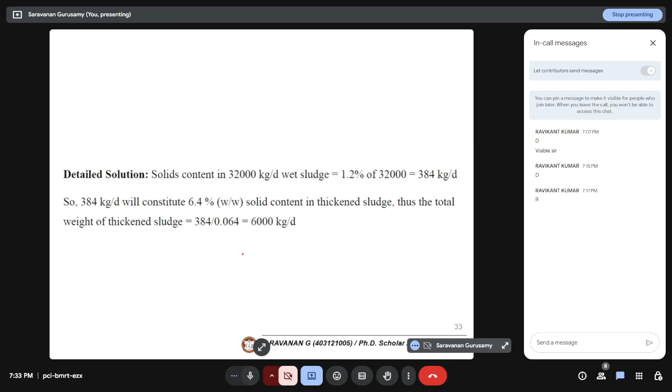I understood that the solid content gets increased due to dewatering. No, that's the wrong understanding. Solid content is getting increased, but solid is as it is. The total solid, 10 kg, the same 10 kg is there, but on weight basis percentage, here 50-50. Water is 50%, solids is 50%. But here 90% water, 10% solid. But the same solid is here. So 384 kg means here also 384 kg. But here 10%, here it is 50%.

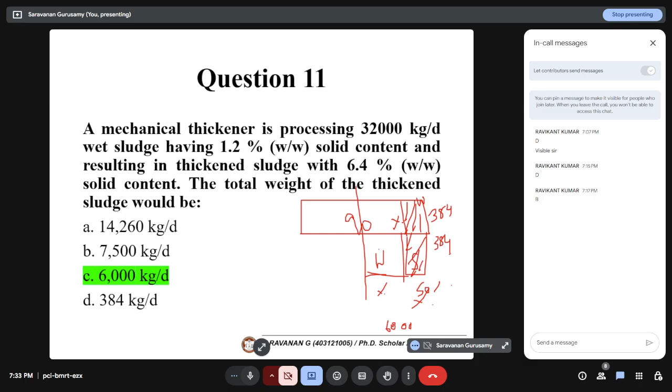Are you able to get it? Sir, I'm not able to get it, maybe I'm not getting you. You are maybe right. Now let me clarify with an example. You leave this thing, I will give you one more small numerical, then you will understand. Let me take 100 kg of sludge. The incoming 100 kg has 90% water content and 10% solids content. So 10% is my solid content out of 100 kg. So 10 kg solids, 90 kg of water. That's why it is 10%.

Now, not the same 100 kg. In this example, same 10 kg solids here and 10 kg of water. So what is the percentage? 50% water, 50% sludge, right? Yes, sir. So if I want to know the total quantity of the sludge, 10 kg water and 10 kg sludge, total is 20 kg. So how do I calculate the 20 kg? 10 by 0.5. You got it? Yes.

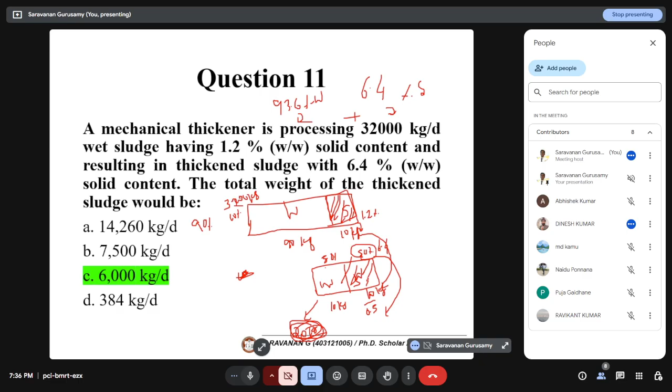Now apply the same to the given example. This is 32,000. Out of it, 1.2% is my solids content. So I calculated that into kg. Then the same kg I applied here, but the percentage is different, 6.4%. So to know the total quantity, I need to divide it by 0.064. Or you can do it the other way. 6.4% is solids, the remaining 93.6% is water. Calculate this quantity and add both, like 10 plus 10, 20. But the easy way is solids by 0.064. Got it? Yes, sir. So that's the simple way.

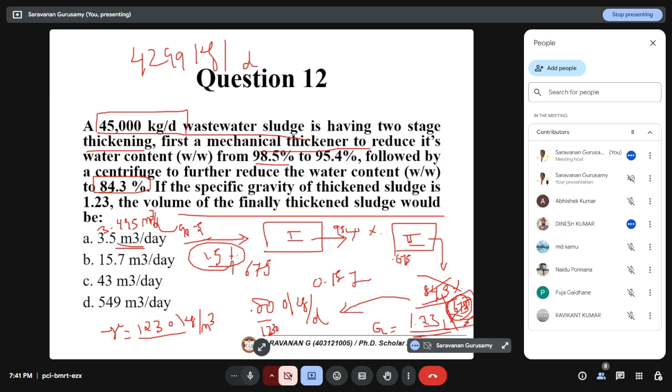And sorry, here the solids I missed. So what we calculated is the water's volume, it's not the solids volume. Yeah. So answer is 3.495 meter cube.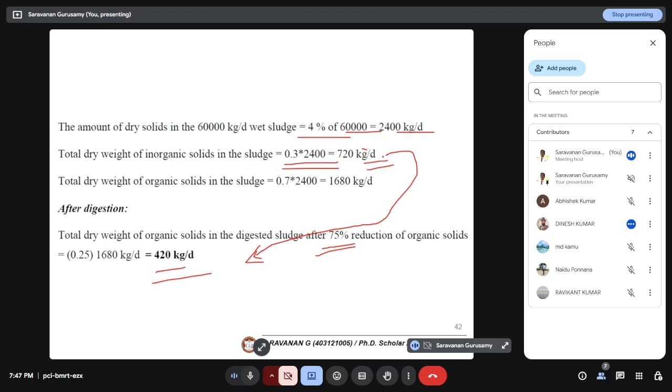So 420. You got it? That is 1140, no, sir? Actually, total. No, they are asking organic solid. Okay, organic. 420. You got it? So first calculate 4% of the total, and then 70% is organic, and then digest this with 75%. So remaining will come. That is 420. Sorry, this is inorganic. This one, right?

Third, last, same data. Another question. Assuming no reduction in the inorganic fraction, because inorganic will not get digested, right? Any salt or sand will be there, that will not digest. So solids during the digestion, the percentage reduction in the total weight. So what is the total weight we got at the end? 1140. What is the initial weight? 2400. Only for solids I am saying. Right? Here water will be as it is. There is no change in the water weight.

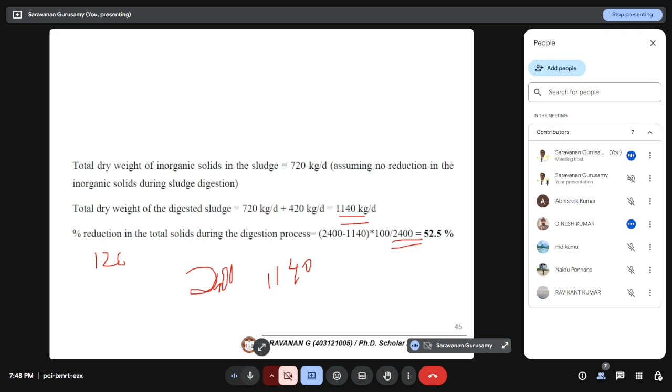So they are asking what is the total reduction in the total weight of the solids. Initial solids quantity is 2400. Now it will be converted into 1140. So what is the reduction? The reduction is 2400 minus 1140 as 1260 divided by the initial 2400 into 100. That's the percentage reduction. You know, initial minus final divided by initial into 100. So 52.5%. Are you getting? Yes, sir. Yeah, that's the answer.

So thickening, water will go off, solid will be staying. Stabilization, water will stay, solid will reduce. Organics, only organic solid will reduce, inorganic will stay as it is. If you know this concept, you can understand all the sums. Okay. Do you have time? 10 more minutes are there. I will move on to next 10 questions.

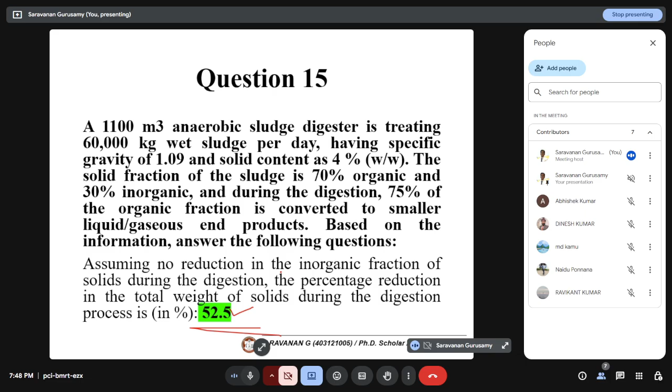Please answer. Which of the following is likely to be not a major component of primary sludge? Inorganic sediments, dissolved organic, suspended organic, biomass produced from biological treatment system. Dissolved, because dissolved organics will be... So dissolved and biomass both will not be there, na? Yeah, both should not be there actually. Suspended organic will be there, inorganic sediments will be there, but as per this question, likely not to be.

So I hope dissolved organics, because biomass produced at the biological treatment should be taken into secondary sludge. So both answers are actually correct, as you said, but as per the given question, dissolved organic will not settle. So I can say this. Yeah, but both answers are actually correct.

Next, waste activated sludge, sand and heavy solids, oil and fat. Again, you can take sand and heavy solids as inorganic, waste activated sludge as secondary sludge from the secondary clarifier, sand and heavy solids from grit removal, oil and fat from the skimming tank. I think we didn't study about skimming tank.

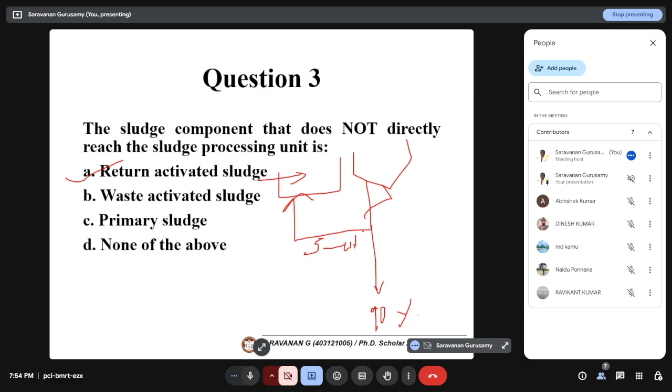Okay. Yes. Which sludge component does not directly reach the sludge processing or management unit? Return activated sludge, waste activated sludge, primary sludge, none of the above. Return activated sludge will be mixed in the aeration tank along with the incoming water. So the answer is return activated sludge; that will constitute only 5 to 10%. The other 90% will be waste activated sludge from the secondary settling tank. Okay. Nice. So here you can see return activated sludge will not go to sludge treatment. It will go to the aeration basin.

Now, volume reduction of the sludge is typically achieved through what? How can we reduce the volume? By reducing the inorganic solids? No. By reducing the biomass? No. By reducing the organics? No, that is not significant. Reducing water content, because sludge contains 99.9 or 99% water, and only 1% or 0.1% will be solids. So removing that 99% will help you reduce the volume of the sludge. So this is correct. That's what we are doing in the sludge thickening process, and the whole sludge management is according to that.

Which of the following is not an objective of the sludge thickening process? Reducing the total volume of the sludge, increasing the solid content. No, it will not increase the solid content, it will increase the solids percentage. Because the volume of water is reduced, the solids percentage will increase, not the solids content, right? Reducing the water content of the sludge is correct, reducing the total volume is correct. Increasing the organic or inorganic matter ratio of the sludge is correct because it's a percentage; the ratio is increasing.

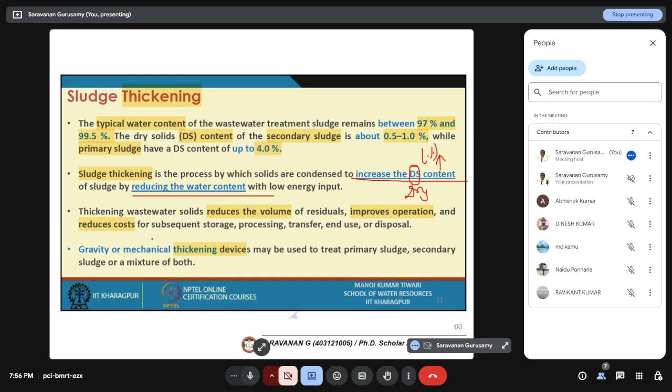Sludge conditioning can be obtained through iron salt addition, lime salt addition, hydrolysis, or any of the above.

I think lime is weird. Oh, anything you can do, because iron salt also people are doing, FeCl3. Iron salt is FeCl3, same sir. Yeah, ferric chloride, lime, alum, and hydrolysis also we can do.

It's a kind of process where larger molecular substance can be converted into a stable, smaller substance. That hydrolysis process may also be a conditioning process only, so any of the above we can use.

You are about to say something about ferric chloride. Yes sir, this was an iron compound, but that will also flocculate the sludge and water, so dewatering can be enhanced, right?

Okay, so here again two statements: the ratio of volatile and total solids. So volatile solids to total solids indicates the organic fraction, it's correct. Because if it is more, it's more organic; if it is less, the Vs by Ts ratio indicates less organic.

It's correct. Density of a specific sludge sample is typically highest in the raw and reduces with sludge processing stages. Whether the density will reduce with sludge processing stages? Sir, I think it will increase, no? So the first statement is correct, second statement is false.

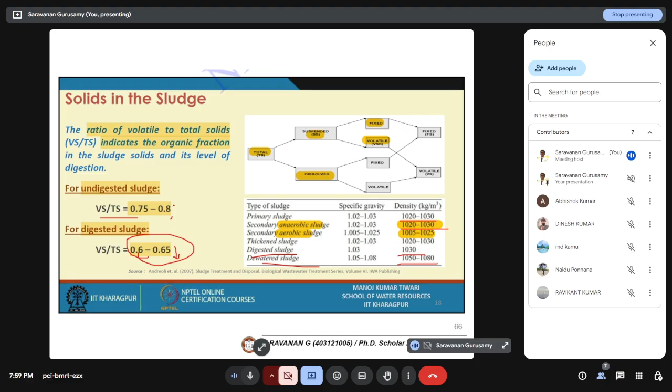See here, the digested sludge is 1030, but primary and secondary sludge are 1020 only. After dewatering, after processing, it will increase, 1080 also it will go. And think about the ratio: digested sludge will have reducing VS/TS ratio. So after digestion, organics are removed, so it's reduced, which indirectly indicates more or less organics. That's correct, first statement is correct.

Fill in the blanks: thickening, stabilization or digestion, hygienisation, drying in between.

Oh, there is no conditioning. Actually it should be conditioning and then dewatering, or dewatering will be the drying stage, right? So they are saying hygienisation. As per the given option, I think dewatering is correct; after dewatering, they are doing hygienisation and drying.

Stabilization, dewatering, and hygienisation, drying. Yeah, as per this order: dewatering, hygienisation. Actually the drying is one of the dewatering steps, but here dewatering, then hygienisation and drying we can do. So conditioning also will come in between before dewatering.

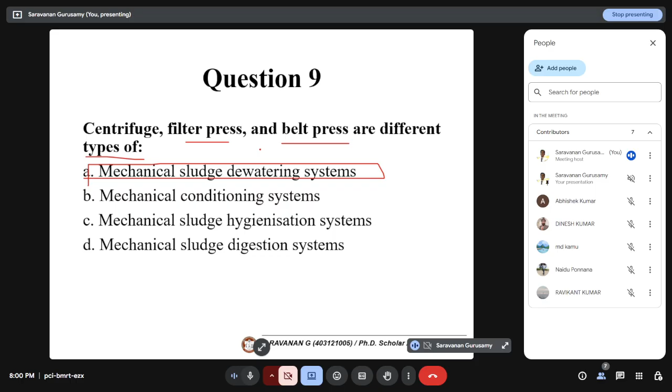Centrifuge, filter press, belt press are different types of dewatering, conditioning, hygienisation, or digestion system. It's mechanical only, everything. So another one, it's actually a mechanical dewatering system because we are pressing to remove the water, centrifuge to remove the water, so dewatering is correct.

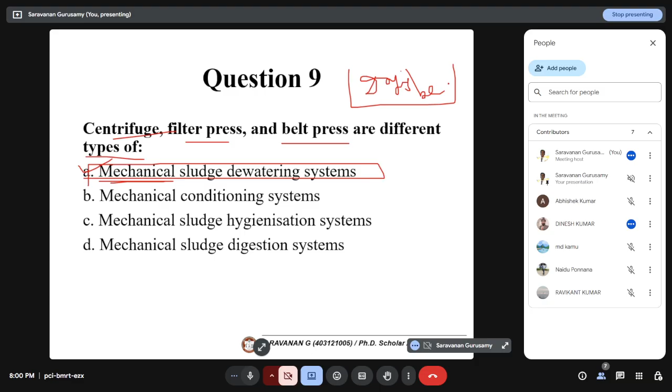Why is it mechanical? What is the other option in dewatering? Under gravity, it's a drying bed, there is no mechanical need, but drying bed is having a larger land footprint. So these are all sludge dewatering, sludge drying beds. Other alternative mechanical methods are centrifuge, belt filter press, chamber filter press, screw press.

Which of the following offers an option to use sludge for energy production? Land disposal, aerobic, anaerobic, or both A and B. What can be used to produce energy from sludge?

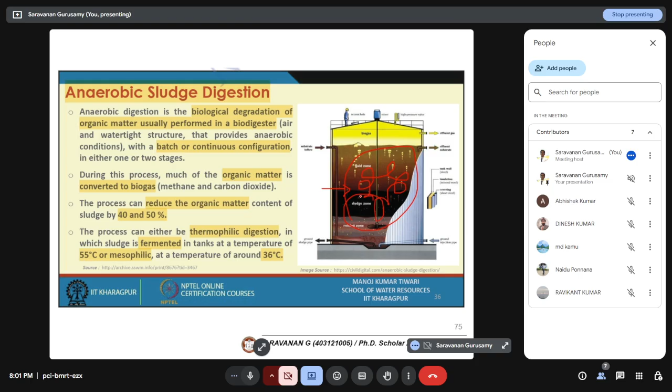Aerobic will not produce any energy, land disposal will not produce energy, anaerobic will produce CH4, methane will be produced. Yeah, because of a larger, rich, high strength anaerobic wastewater, sludge is also a condition of wastewater only, right? 99% water only. So that can be digested to produce more methane.

Sludge hygienisation is primarily the process of reducing the weight and volume? No. Dewatering the sludge? No. Reducing the content of pathogenic bacteria? That is correct, right? So it's reducing the content of pathogenic bacteria to an acceptable level to match with the local regulation standards.

Some standards are there. I will upload the reading material as a toolkit for biosolids and fecal sludge management. These standards help reduce pathogenic bacteria, as accepted by the competent authority.

The competent authority follows Indian standards. I will show you they have a standard for fecal coliforms, E. coli. We discussed this in the second week, right? In the third week, we covered the quality characteristics of wastewater, including bacterial and biological characteristics like coliforms. So that is one of the criteria.

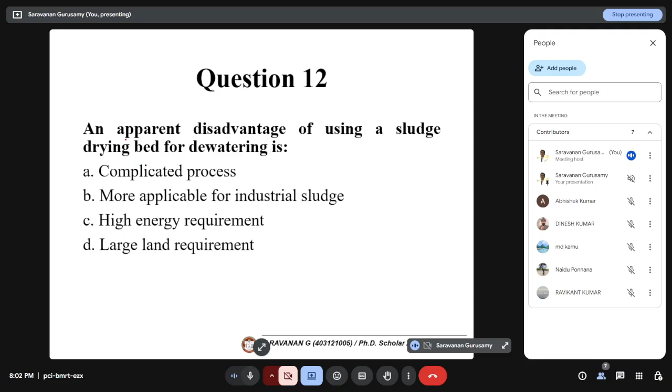12th question: an apparent disadvantage of using sludge drying bed is land area requirement. Here's another simple question: a batch of 4,500 kg of wet sludge.

98.5% is water. It is processed, so thickened. Thickening will reduce only water; the sludge solids will remain as it is. So thickened sludge is 1100 kg. What is the water content of the thickened sludge?

Can you calculate? So now 4500, how can you approach this? Always find the solids first, in thickening or any process. 98.5% water, so 1.5% solids. How much will that be? 4,500 into 1.5 by 100 gives 67.5 kg.

That is my solids. So out of 1100 kg after thickening, 67.5 kg will still be my solids. The remaining will be water: 1100 minus 67.5 gives 1032.5 kg as water. So what is the water content? 1032.5 divided by 1100, into 100.

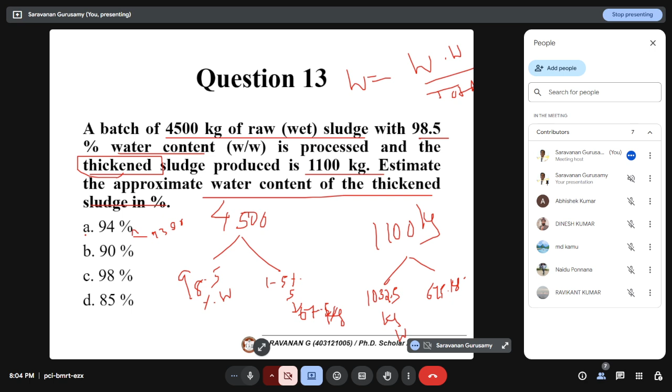Do you know the formula for water content? Weight of water by total weight. So that gives 93.86, equivalent to 94. Somebody posted A - that is correct. Thank you, hope it's clear.

Second question on thickening: solids stay as is from the secondary treatment with a total volume of 60 meter cube per day. That's the quantity Q. Total mass is 2750 kg per day, digested in a standard aerobic digester.

So 2750 kg per day gets digested, out of which 75% is organic, 25% is inorganic. How much will be organic, how much inorganic? Calculate 2750 into 0.75 for organic, giving 2062.5 kg organic, and the remaining 687.5 kg per day is inorganic.

Now 70% of the organic is converted into liquid. If anaerobic, it converts into gas; in aerobic, it converts into liquid. So 70% goes out of the system as liquid, and only 30% is converted back into solid. So 2062.5 into 30% gives 618.75, which is my organic solids.

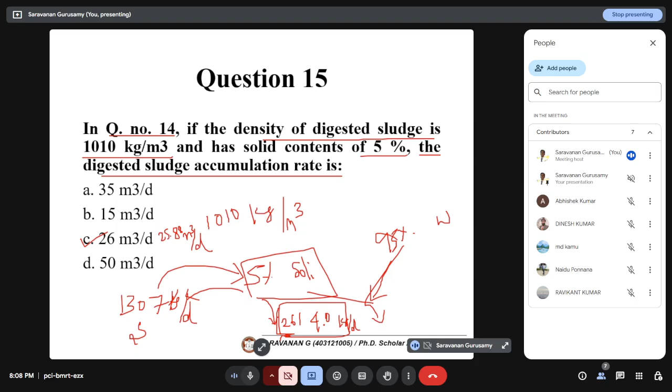This is a simple back calculation, but you need to know that 5% is the total solids, then what is the total quantity along with the remaining 95%? So divide by 0.05, same as in the first question. This gives the total volume: 95 plus 5 equals 26,140 kg per day. Converting into meter cube per day with the density gives 25.88 meter cube per day. Hope you are clear.

Yeah, thank you so much.